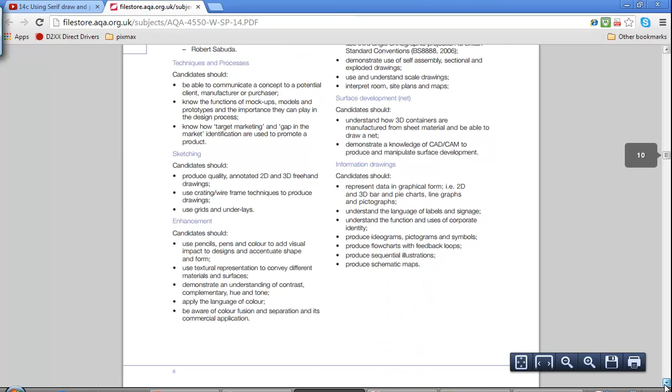Okay, so moving on. Next thing we need to look at is what we're going to be manufacturing these things from. Now we know that the easiest thing to produce here is using paper and card, and that is ultimately what this actual box will be made from.

Evaluation techniques we'll look at a bit later on, but the thing that we need to focus on is the quality of design and quality of manufacture. To get that, we need to look at these social, moral and cultural, economic and environmental considerations, and we also need to look at the sustainability of the product, which is why we're using card.

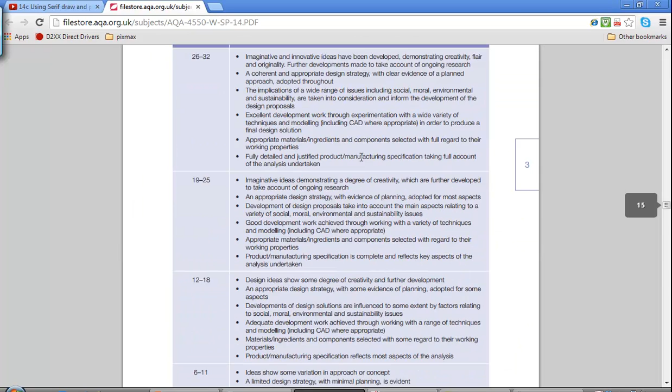If we go further down to the actual marking scheme, this falls under development of design proposals. So to get into these top marks, what we've already done is done some excellent design work, as it's written down here, or development work, using a wide variety of techniques using CAD.

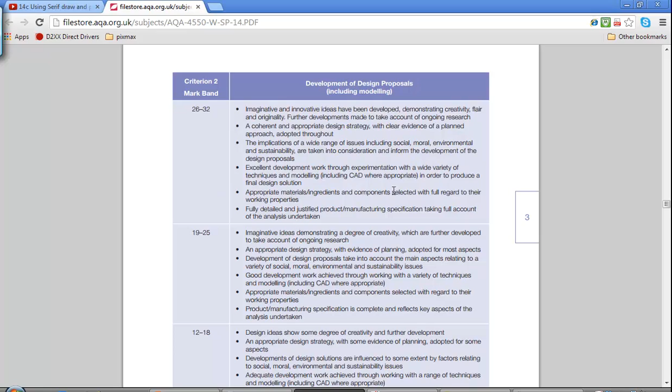That is basically your designing of your logo to go onto the different mediums, and this design sketch, although it doesn't have to be as in depth, is quite important because it's going to add to these marks into criterion 2. So although it's almost towards the end of the project, because we've already designed the logo and then we're designing the product that is going on, it still all comes under criterion 2. And so that's the idea behind this, to actually get more design works and developments in there.

Okay, as it's got down here, we do need to still keep it concise. Make sure we get all the clear information in there that we need to use, and make sure that text is legible and easy to understand. You can't go wrong with this bit.

Right, let's flick back to our drawing then. I'll just minimise this one and take that back.

Okay, so with all that in mind, these are some sketches that I've quickly drawn up. What I've tried to do here is draw this bit that shows the top and the bottom of a box separating. Very easy to do using isometric paper, and I'll show you that using 2D design. You can try to draw these in perspective as well, but because I've got quite a bit of perspective in my work already, I'm trying to show different skills, so the isometric or planimetric approach is ideal because it's square, and all we're doing is drawing squares.

So where we're looking at these, that just shows how the box goes together, your exploded view. This is just a square that I've drawn designs onto to make it look more interesting. That's another key point here. What you shouldn't have if you're going for the high grades of manufacturing is a net of a box that's literally just a six-sided cube.

There's got to be something a bit more dynamic about it, some sort of mechanism, locking mechanism, some sort of surface decoration. There's got to be something there that makes that product look amazing, as if it would sell in the shop. Keeping it just square and simple isn't always the best way.

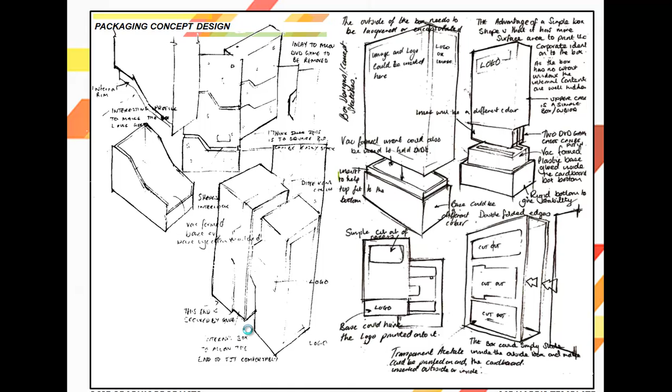You shouldn't really have too many sheets of these, although it's easy to actually draw things that are square. What we need to do is try to get something a bit more orderly that we can then develop.

So you can see on this one it's quite easy. What I've done here is development 1, development 2, development 3. I took the idea of the box being separated and just sliding up, so I took a normal box and just put a line through it or cut it in a direction. This one's obviously cut down. What I've tried to do down here is actually start to put corrugations in.

Corrugations you can do very simply by making the actual box slightly different, in the sense that one of the six-sided faces has actually got these things built in, and we'll show you that a bit later on when we do the nets of the boxes for the packaging.

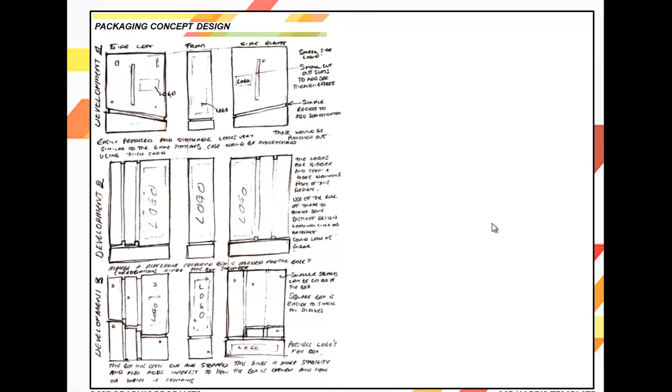For the moment what we need to do is come up with a final design that we're going to draw over on this side. So I've got the final things down here, and what I can do is say which one I'm going to choose. I'm actually going to choose something that sort of goes between the two of these, and it looks very similar to that. So what do I do next is look at 2D design.

So let's fire up 2D design, and here we go. Now 2D design is very simple. What I'm going to do first is go to the grid, double click onto it, change it to isometric - you can do oblique if you wish, but I find isometric is probably easy to do. I'm just going to knock that down to 5mm, take that one down to 5mm, and click OK. So what I do then is start off by drawing my simple cube.

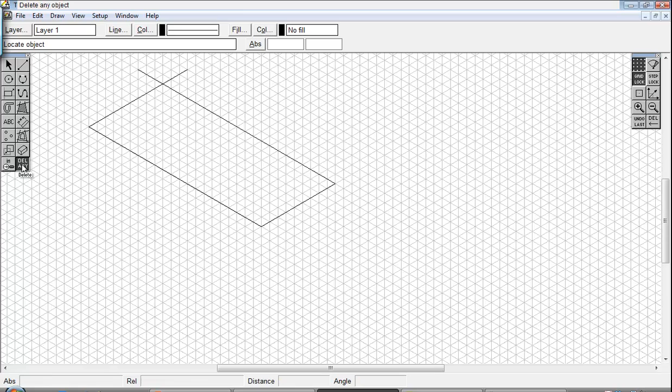Now this doesn't have to be to scale, and I'd argue it probably wouldn't be while you're sketching. If you can't draw very well, the first thing you need to start by doing is drawing that rectangle. If you get stuck with a rectangle and you're not sure what you're doing, this is easy to track down and look at.

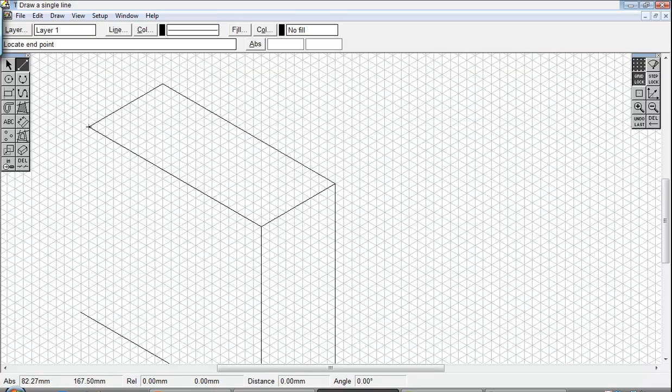So I've changed that to the delete segment rather than the actual bits of the square line, and all I'm going to do is simply draw the box going down. If you find the box itself is too short, depending on what you're doing, square boxes are good because they're easy to stack, so they're easy to deliver, and they're also quite a good shape to start off with as a crate to develop your ideas. So starting off square isn't so much an issue as you'd probably think.

So if I zoom out, you can see what I've started to do is get my box. Now if you find you need a greater height, all we need to do is just project the lines going up, because I will need mine to be slightly bigger, and I'll do exactly the same.

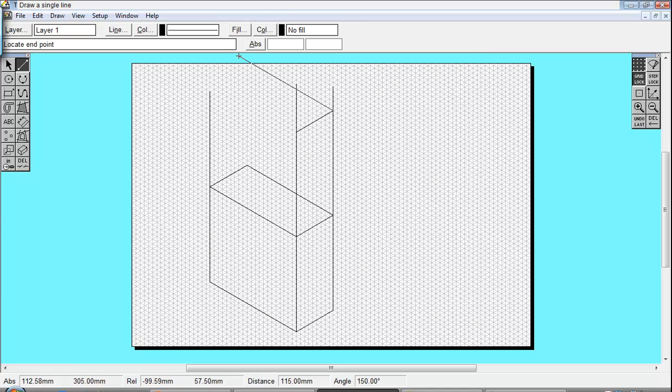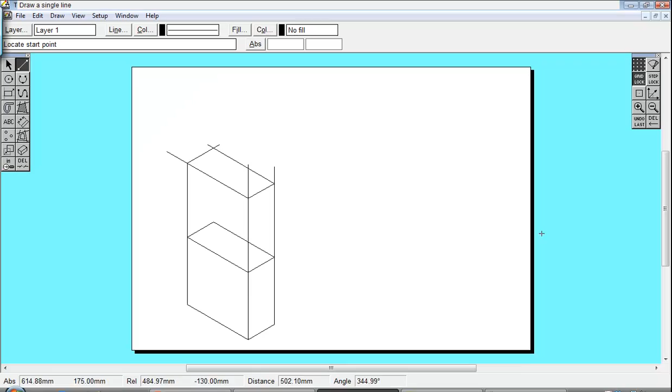Now if I find it doesn't fit on the page, a bit like what I'm trying to do now, then what you need to do is change the page sizes, and the way you do that is very simple. All you do is go to where it's got setup, where it's got drawing. You could change it on the layout, so I could click onto layout, and instead of standard size as A3, just click onto A2, and away you go. And then when I zoom in, it goes back to being where it is, and I can start to design my ideas from there.

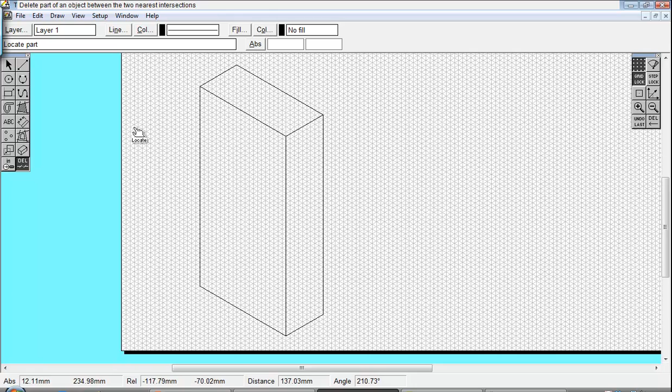Now I'm just going to keep this square for the time being, just because of time, and what I will do is just show you quickly how we get that square to draw around. You could draw around it by sliding it under a piece of paper, or you could just turn the grid off, refresh, and either go to File, Export File as JPEG, or WMF file.

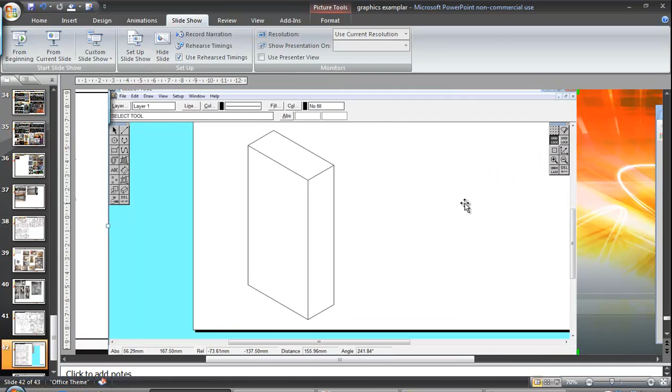JPEG's probably better, that's this one as well. If you want to do the JPEG, you can do it that way, or the easiest way by far is just to screen print, take it back into your designs, and click to paste it into the box, and away we go. So what I can do is just trim that down and drop it on the side of the page. Okay then, that's that tutorial sorted of why we're doing it.

The next tutorial is just going to focus on how I get this sort of sketch to go into your final design here.